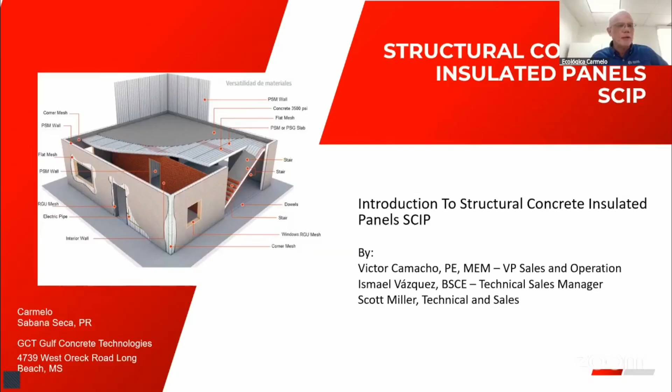And today we'll be speaking about the introduction of the structural concrete insulated panels. And I don't know if Scott is with us this afternoon. Scott is our sales and tech in Florida.

So we're going to give a short introduction of what the structural concrete insulated panels are. We'll go component by component and describe those, what applicable building codes for the U.S. and also Puerto Rico it complies with, and what thermal characteristics these panels have, which is a very good bonus there to do the construction.

Also, if we have time, we'll go over from the foundation all the way up to finishing the project. And also we'll be discussing several projects that we have done in the U.S., Puerto Rico, and also around the world with these SCIP systems. And then at the end, we'll collect all the questions and make sure they're all answered.

So what we're going to be speaking about today is structural insulated building component or structural concrete insulated panels. These were developed in Italy more than 40 years ago. And we have been using it widely in structures in the U.S., Puerto Rico, and the Caribbean. We also did some testing where we qualified for the Florida product approval, and we can also get permits with the government agencies for construction and for use of these buildings.

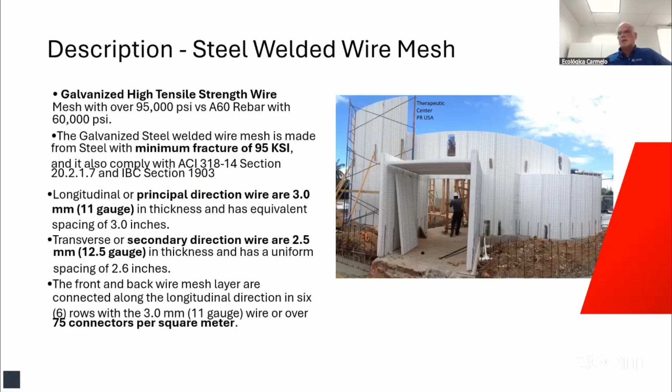So just to give you a little bit of detail on the wire we use, it's high tensile strength, galvanized, 95 KSI. And it has two types of strand. One on the vertical side, which is the principal direction, is 3 millimeters, or 11 gauge. That's where all your strength is. And we also have some cross wires which are 2.5 millimeters, or 12.5 gauge. That's your secondary steel.

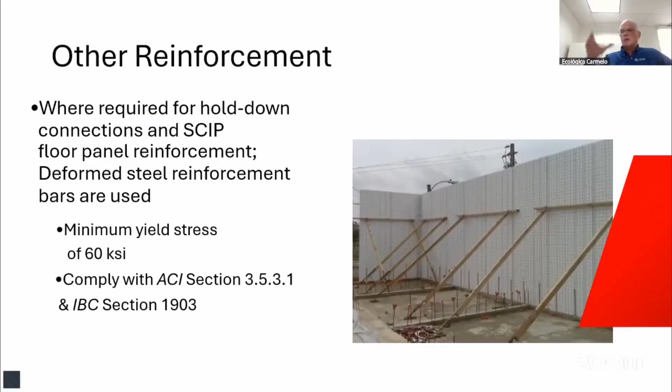And then what other reinforcement do we need? It all depends on what the structural engineer or the architect is looking for. They can do additional reinforcement, but mainly these systems were tested with just anchoring to the base of the foundation or floor using 3/8 inch rebar, drilled in about 7 inches, extending about 18 inches over the surface of the floor, spaced every 16 inches, with 2 rows staggered. So that's where you place the panel. A little bit on the mortar we use.

In our company, GCT, we make structural mortars in our plant, and we require it to have at least 4,000 psi. If you use another brand or regular concrete, it has to be 4,000 psi. And we also use a machine called the Monomix.

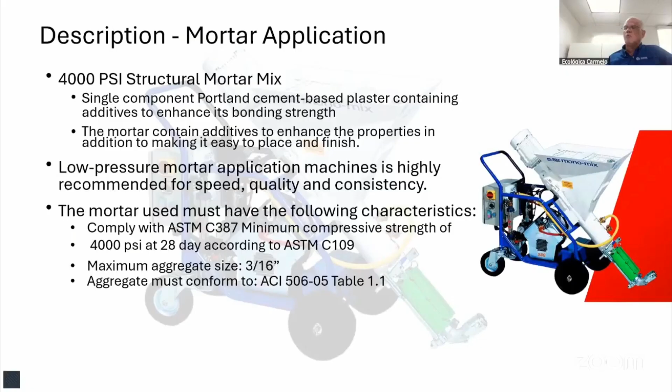This machine mainly pumps out in low volume, where you can put the bag on the hopper on the top, and it'll mix it with water, and it has a line about 32 feet, 25 millimeters or 1 inch diameter, and then you can spray the structural mortar on the walls or on the ceiling as well.

And then on the top of the slab, let's say in between slabs or on the roof, you may specify 3,500 psi concrete from your local ready-mix producer, which will have a minimum slump of 2 inches. That's real low, but if you have a high pitch roof, then it'll be 3, 4, depending on the design of the mix.

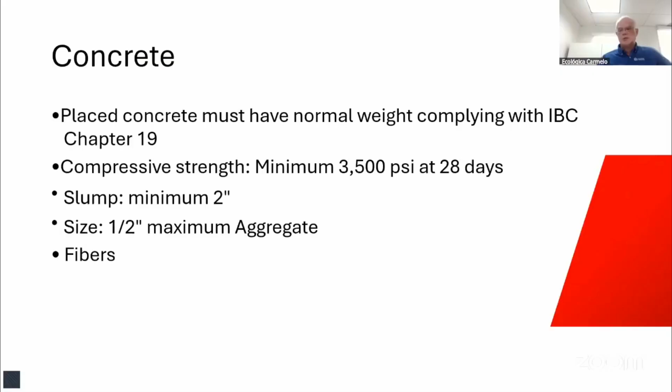And then the maximum aggregate you should have is 1/2 inch or less, so it gets in between the meshes and the foam as well. So that's all we require for the concrete over the slab or over the panel, and your foundation will also be regular concrete at 3,500 psi or 4,000 psi. All depends on what the structural engineer is designing for your foundation.

So what type of spans can we do with a PSM 80? That's one of the panels we use in our areas a lot, and you can use that up to 10 feet, and you can get up to 50 pounds per square foot of load, with your live load and dead load. So if your in between spaces are up to 12 feet, then you can't use that panel.

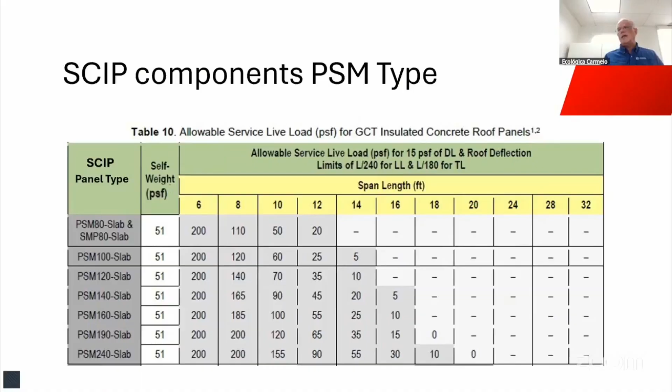So you go down your chart here, probably 35 pounds, is something that you can use. So you'd be on a PSM 120 or over, so you can use 120 to 240. But if your walls, in between walls, is over 12 feet, then you have to use a PSG.

So these are the PSGs, and they have a small girder, probably like 4 inches by 5 inches. And this is where we put two rebar, two number fours, making sure that you have chairs there so it's not sitting on the foam, okay? And these come in 2, 3 and 6 girders.

So it depends on the length you have in between walls or shear walls, or if you don't want any beams in between those. That's how much length you're going to want to go. Let's say you want to go to 20 feet. These are the type of panels you'll be using for those types of lengths.

And again, on the top, we're going to be pouring 2 inches minimum of concrete, okay? If you have a sloped roof, then it'll be 2 inches on the bottom, 2 inches in the middle and 2 inches on the top. That'll be your thickness of concrete over the steel mesh, okay?

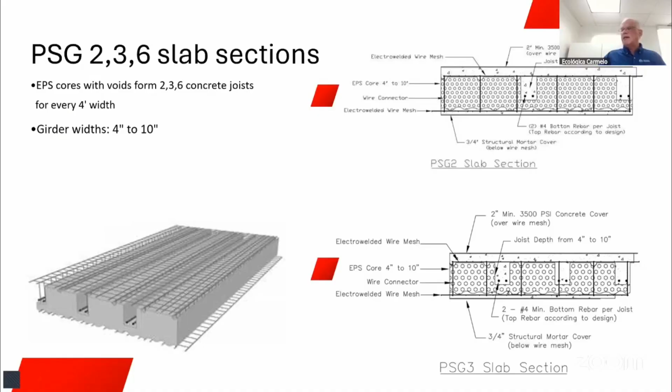But if you have a flat roof, then every foot you have to go up a 1/4 inch. So probably in the center of your building, it'll have like 5 inches, and at the end it'll be like 2 inches of concrete over the mesh.

So your PSGs, in terms of thickness, I love using the PSG 2100, which just maintains a slab about 6 inches, and it'll finish with your concrete and the structural mortar that's underneath. It'll finish about 8 3/4. And this will have like 50 pounds per square foot of self-weight, okay?

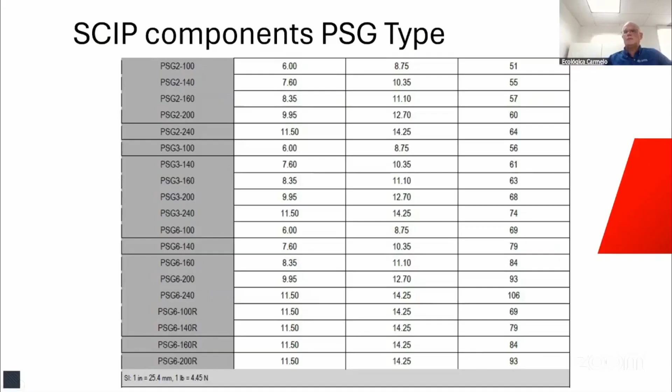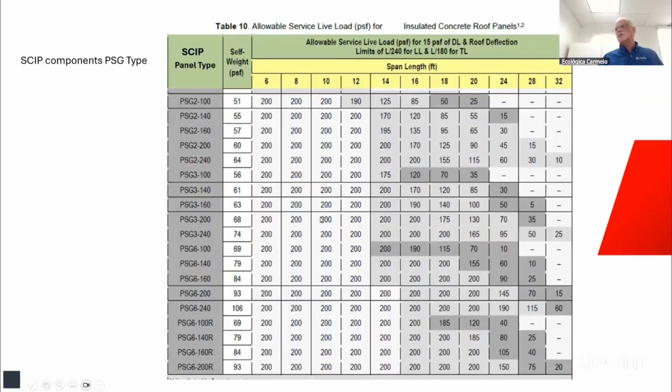And if you're a designer, we also have these tables handy where you can go in, let's say with your PSG2-100, and see how far you want to go in between walls, let's say 18 feet. So you still have a load about 50 pounds per square foot there. But let's say you want to go all the way to 32, then you can go to the PSG 6 240, and that's where you get the 60 pounds per square foot. So the longest we can go with these panels is 32 feet without any reinforcement or beams in between those two walls. So that's how you use these tables.

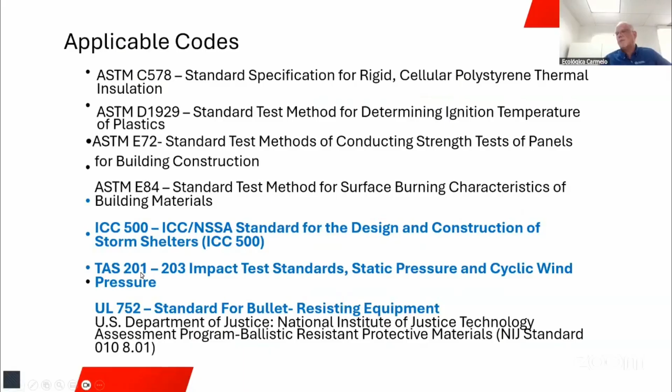So the applicable codes with this system: we comply with the International Building Code, Residential Code, the Florida Building Code, and the Puerto Rico Building Code. We also comply with ASCE 7 for minimum design loads. So we have done our homework in terms of lab testing these. Now I want to show you some of the testing we have done. It also complies with the ICC standard for design and construction of storm shelters, which is very important, and also TAS 201, which is called in Miami-Dade for high velocity winds.

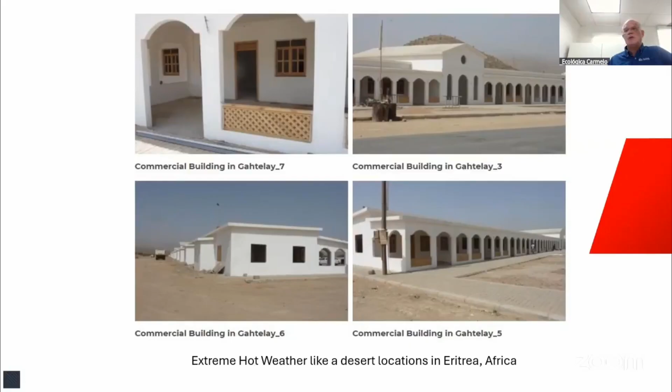And this is how these panels work. Let's say you have a beam of heat projecting onto a regular concrete wall, starting with 109 degrees. On the other side of that wall, if you touch it, it's going to be almost 90 degrees, so a difference of about 19 degrees. But with the structural insulated panels, with a core of 3 inches, you start with that 109 degrees, and you can see the gradient lowering throughout that foam, and it comes out almost 30 degrees less than where the heat started. So it's very impressive.

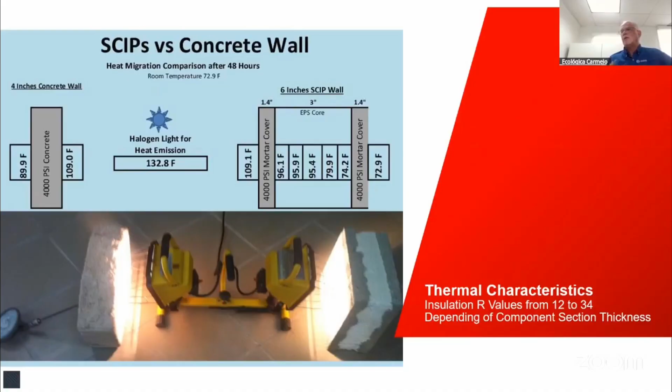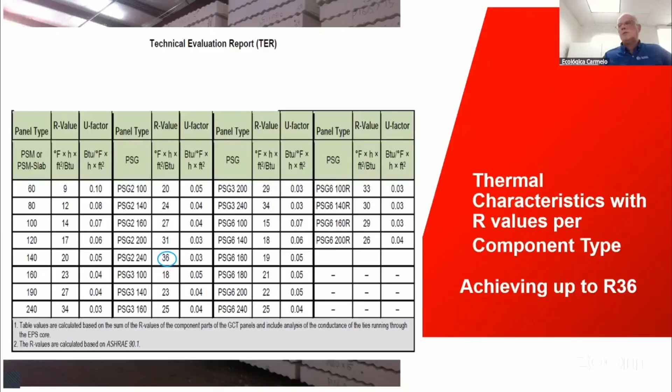So again, you can provide an R value of 12 to 34 on walls, and 12 to 36 on roofs. These are the R values for each of our panels. A PSM 80 will have an R value about 12. The U factor is 1 over R, shown in the next column. So from an R12, you can go all the way up to the PSG 240 with an R value of 36. All that is in our manuals, and you can download the technical evaluation report from our website.

So these are some of the tests we did to comply with the building code. We did bending, compression, and tension on the full scale system. We built some rooms and did the testing on those. In our manual, we have the actual loads for these panels. So a PSM 80 at 8 feet will have 15,500 pounds per linear foot.

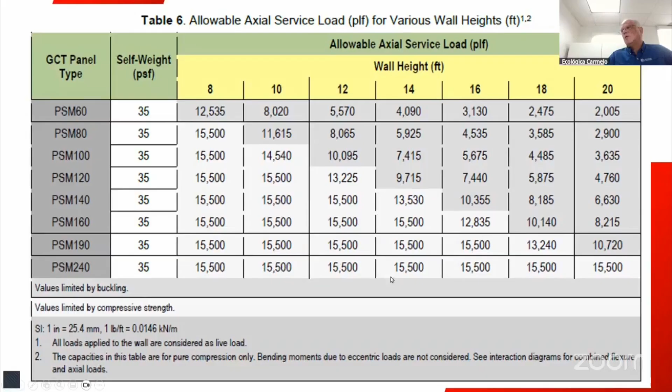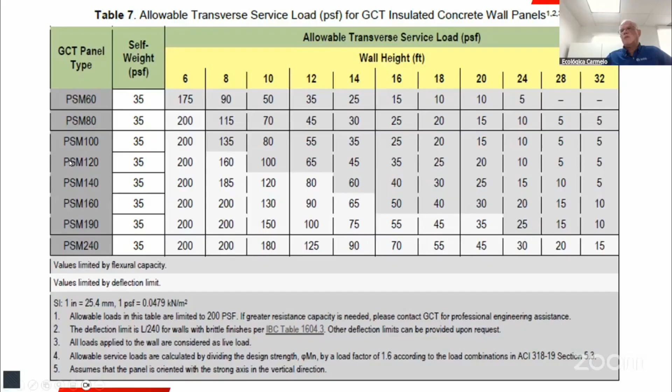If you go all the way down to the PSM 240, you'll have that 15,500 pounds per linear foot all the way up to 20 feet. This is just for designers to calculate which type of panel you'll be using in these structures. We also have allowable transverse service loads for wind. For wall height at 10 feet, this is allowable value for a PSM 120, I'll have like 100 pounds per square feet.

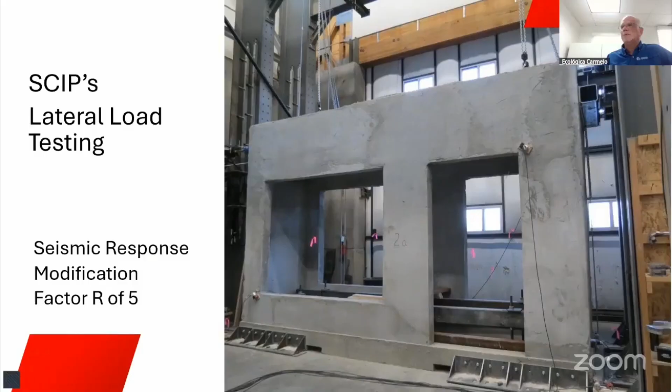So we went to the lab and did all this testing, bending, flexural, and one of the most interesting is the lateral loads, where it has a response modification factor of 5. Regular building materials would be like 3, a little bit higher, but ours was 5 plus 5.5, something like that. So for seismic it's a great product to be in right now, and also for taking loads laterally as well.

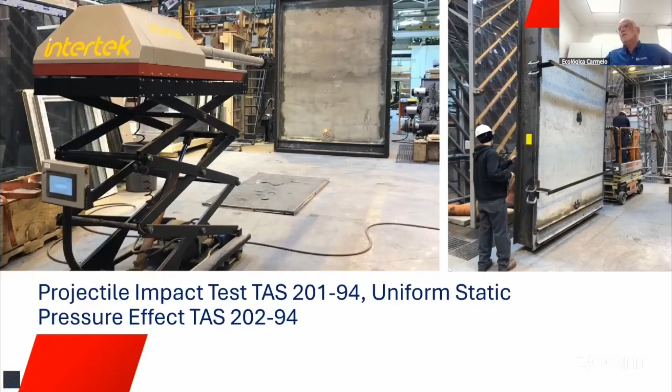We also passed the TAS 201 test. They project a 2x4 at 80 feet per second, and the way they pass or fail this test is that if you hit one side of the wall and there's nothing coming out on the other side, then you pass it. In high velocity winds like hurricanes, you can see 2x4s pass through block walls and other types of walls, so that's very important when we're building something. This is our report from Miami-Dade and also the Florida product approval, where we passed these tests with our system.

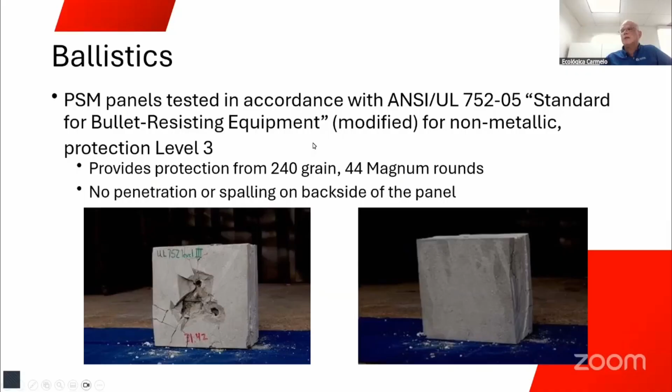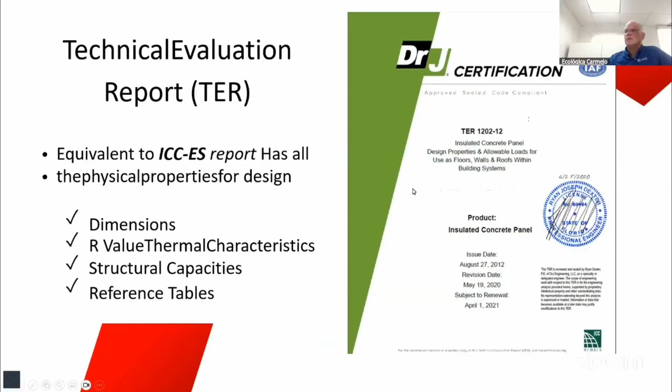So this is our technical evaluation report. This is how it looks, and this is equivalent to an ICC-ES report. Again, we have the dimensions, the R values, the capacities, and the reference tables we just spoke about, which gave you some details on those as well.

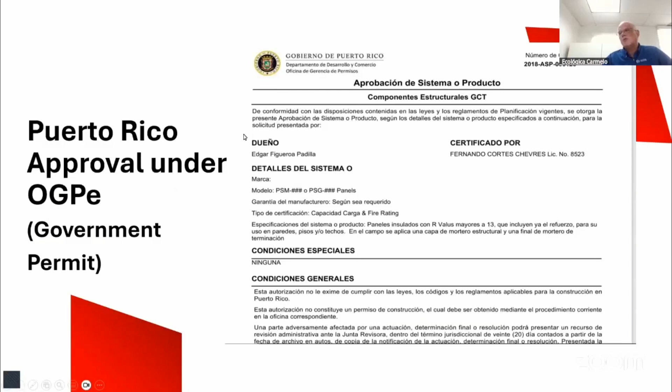The DrJ certification meets, let's say, 47 states, including Puerto Rico. If you have your structural engineer sign off in California, North Carolina, you can also do buildings in those areas as well, which we have, with the structural concrete insulated panels. You can get your approval with your government agencies for construction, or for use, to get those permits.

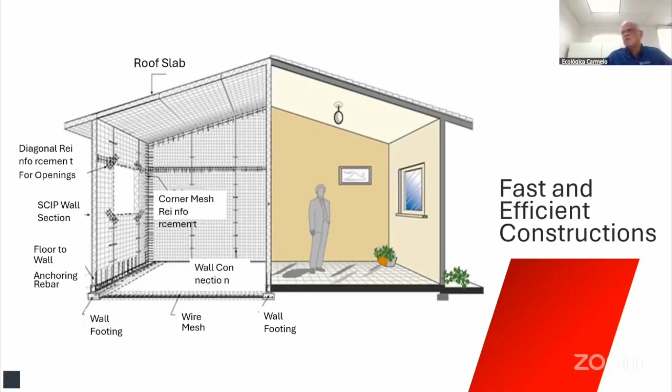We do a couple of reinforcements around the windows, U's, L's, and meshes, flat meshes. Once we have placed all our electricity conduits and the plumbing and we have everything in place, then we shotcrete the walls with a structural mortar. At least we'll be having, let's say, 4,000 psi, so it'll look like a conventional concrete house.

So the difference between a conventional construction versus construction with structural concrete insulated panels is that you don't need any big cranes to pick up steel forms or wooden forms. These panels only weigh like 1 pound a square foot, so they're easier to install. In 50 seconds you can install one panel, one next to each other. That's how quick you can do it. So this system is really fast in terms of labor and construction.

So you'll need less people to work, less. You can also say almost less skilled people, because I think when you most need somebody to erect these and finish it is when you're doing all the plastering. That's where you need somebody very good doing those finishings. But anybody can place them one next to each other and then work them. So you'll have a cleaner, safer working environment when using these panels.

Again, we're comparing here traditional blocks versus a wall with panels. When I speak to some contractors, with 2 people you can put from 200 to 300 blocks a day, that's about 265 square feet. But with panels, we have installed from 1,000 to 2,000 square feet.

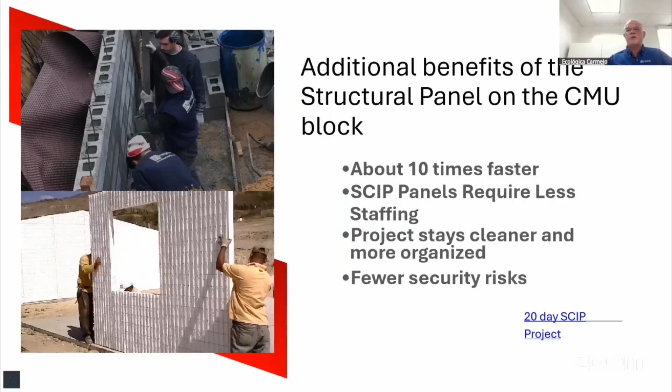That's almost 10 times faster when you're doing that. But again, you need a good construction schedule to do it quicker and faster.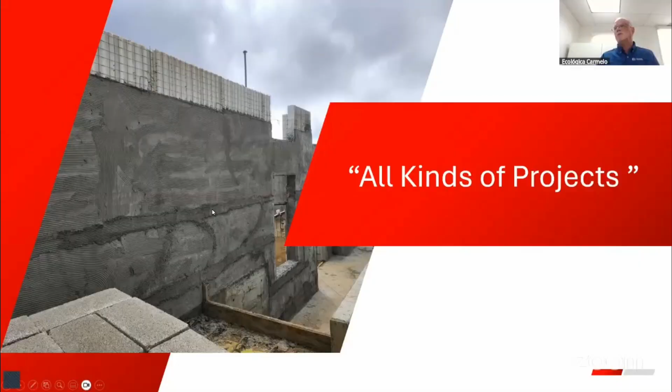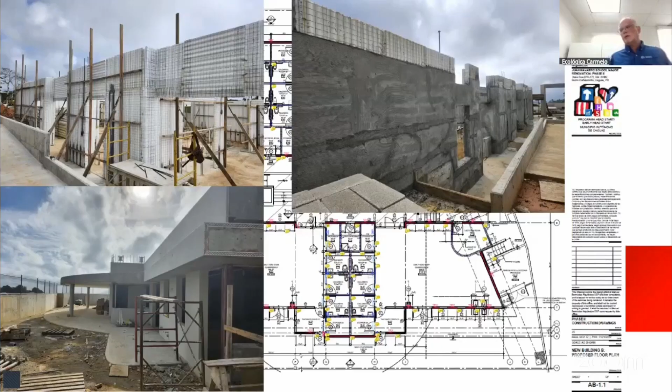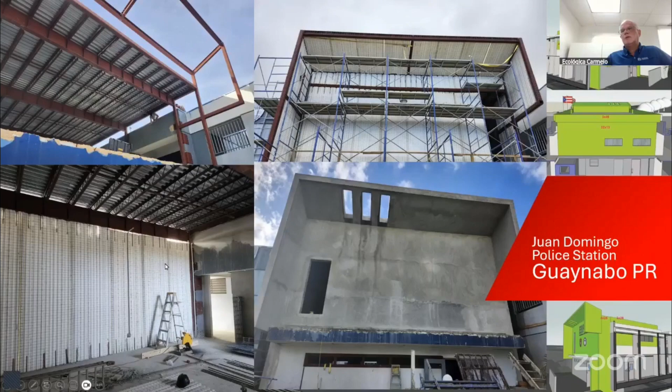Let's see all kinds of projects we have gone through with the SCIP panels and also Madeira as well. Here this is a school. They did the walls, and also the ceiling has insulation as well. You can see here on the top where they twist the panels to the side and use it as a beam. So every foot of this panel can either be a column or a beam, whichever you want to use it as. Here we integrated steel with the panels. They welded the rebars onto the steel, and they placed the panels and then the mortar.

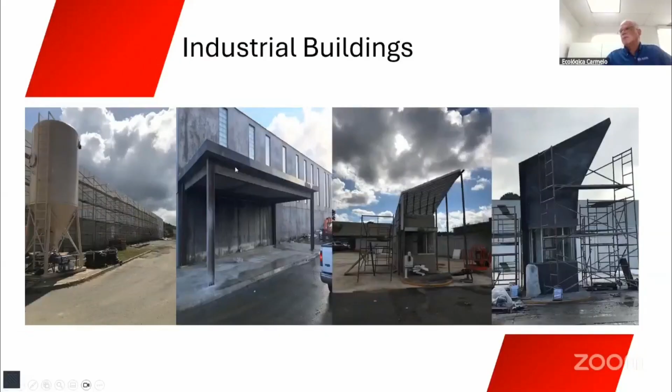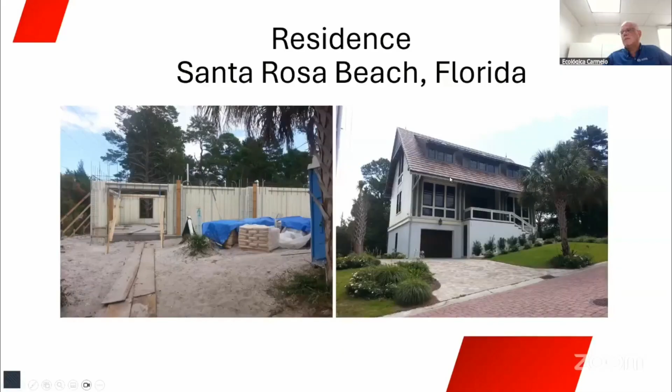More projects where they have combined wood and also the panels as well. Here you can see the columns and beams. As I say, you can build all your beams and columns with this material and also create shear walls as well. This one is also in Florida.

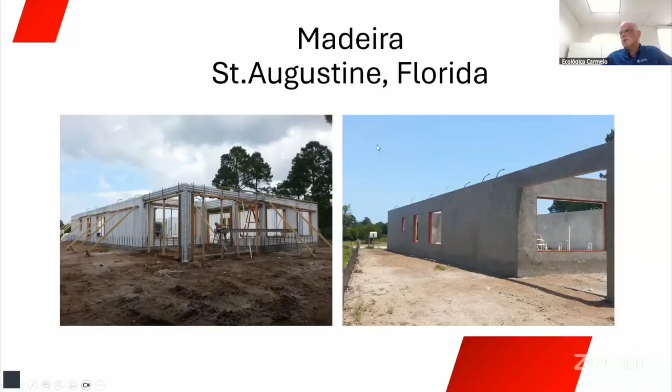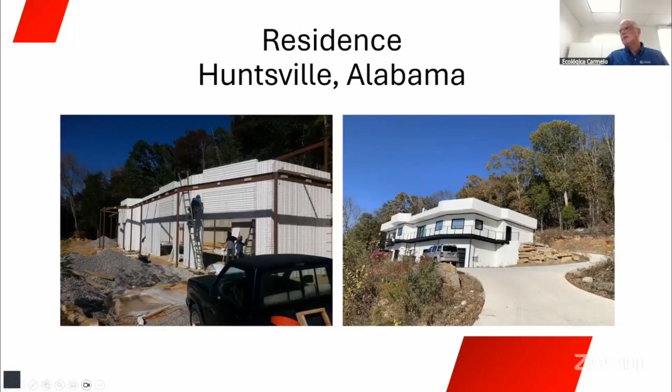Where we have our plant in Mississippi, this house is also all walls and roof, slabs in between, are all panels. In Texas and Alabama you can integrate steel as well - they did a steel porch here. You can also do it with the panels, probably the look that the architect wanted in that project.

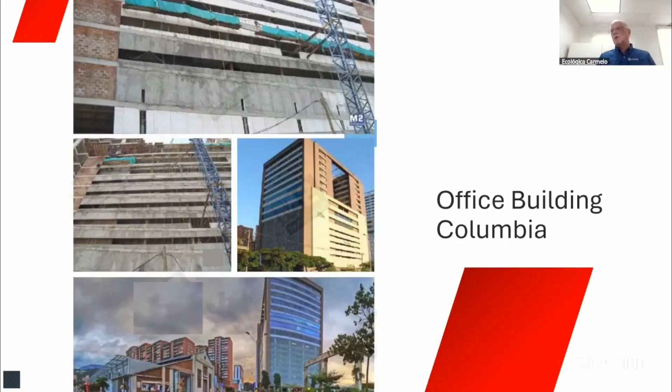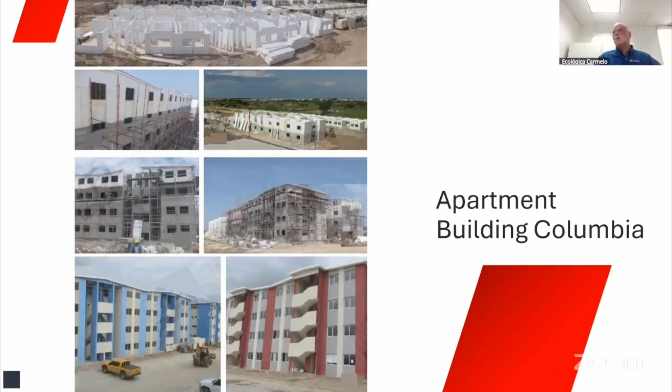Just the panels alone, if you were doing a building with just panels, you can go up to 4 floors, which I'm going to show you an example of real soon here. There's another type of structure, and you can see that you can make these panels rounded. This is the project where we did all the panels from the first floor to the top, so it's a 4-story high building, and everything is made out of panels. So it's a doable structure to just do it with just panels.

And again, that's the general information of these panels. Since we have a little bit more time, I'm going to spend the next session talking to you about some of the details we do when we're building these panels.

We start off with our technology, where it started in Italy over 40 years ago. The great part about this system is the R value - it lowers the heat or the cold inside that building, depending on where you have your construction. Our GCT has the Puerto Rico Building Code and Florida product approvals, so we can build these with the building code. We've done residential, commercial, industrial, as you've seen in those pictures. And the best thing is that there were no damages to construction after Hurricane Irma and Maria in any of the buildings we did in Puerto Rico.

And it's a very durable system, especially on the beach or in the waterfront.

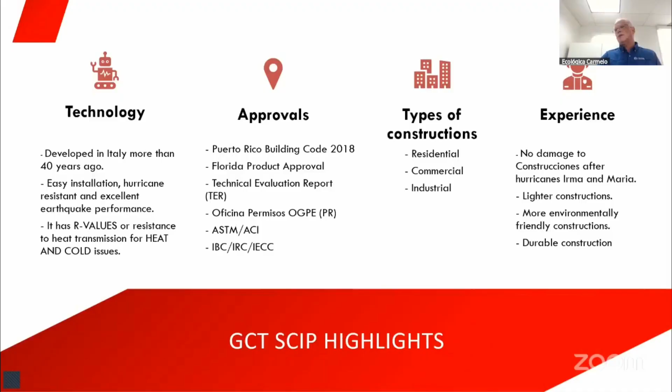So how do you start with building with this system? You start off with your foundation, and then you put your plastic sheeting, so no humidity or moisture comes up from the ground.

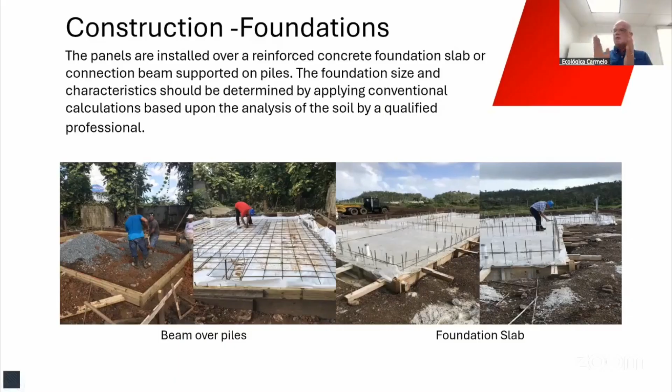You put your rebar, so now you make your foundation. It's not necessary to put all your dowels up from the bottom; you can drill them later. I prefer that, so you can finish your floor easily without having all these rebars in the middle. The problem with putting rebars from the bottom, from the base, is that they start twisting and turning, and then when you go to put your panel, it's a little bit difficult.

But the way we like to do it is drill a hole, let's say 7 inches down into the foundation or base, and then leave 18 inches over the surface of the concrete. All you need is a number 3 rebar, 3/8 of an inch. That's how we tested it with the technical evaluation report. If you want to go to 1/2 inch, that's your decision, but with 3/8 it's enough.

So you start on one side of the wall, let's say at 0.0, and every 16 inches you drill a hole. Then on the other side, you stagger it 8 inches from the first one, and every 16 inches you space them out. So every 8 inches you'll have a rebar on your wall.

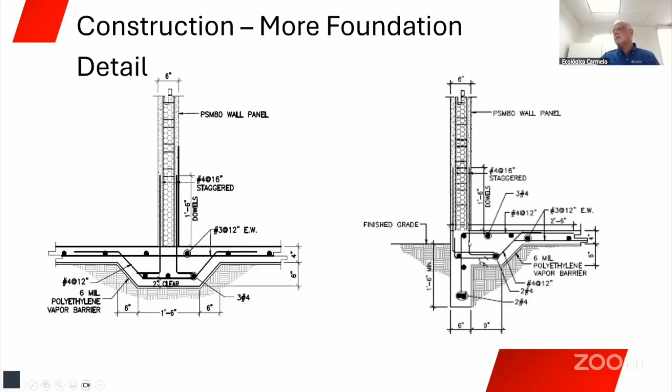Now let's say you have an in-between wall foundation. It's the same thing. You drill your hole 7 inches down with your epoxy, and if you're on the lateral sides of the building, you have some sort of foundation like this one.

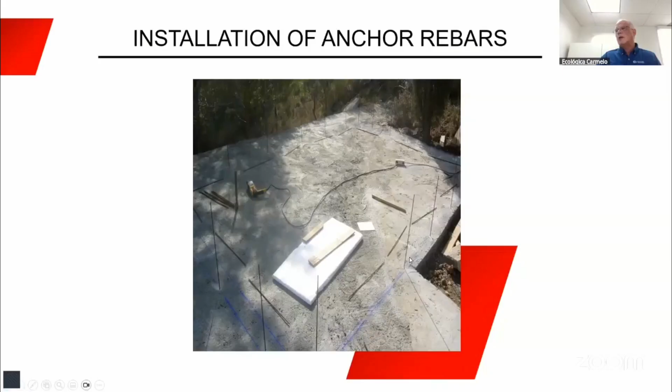So you mark it with a chalk line where you want to put your wall, then drill the hole every 16 inches like you see here. You're better off doing it afterwards, after you finish your floor, because that way any mistakes with plumbing can be fixed—you can move the wall 1 or 2 inches to the side, and it'll help you out.

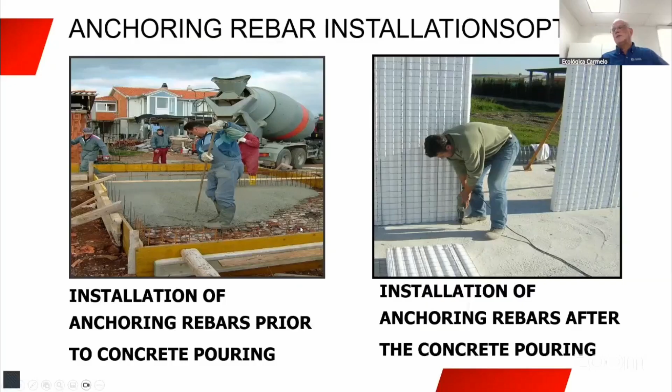Now if you start with your anchoring rebars from the bottom, that's where it gets a little complicated when putting the panels—it won't be straight.

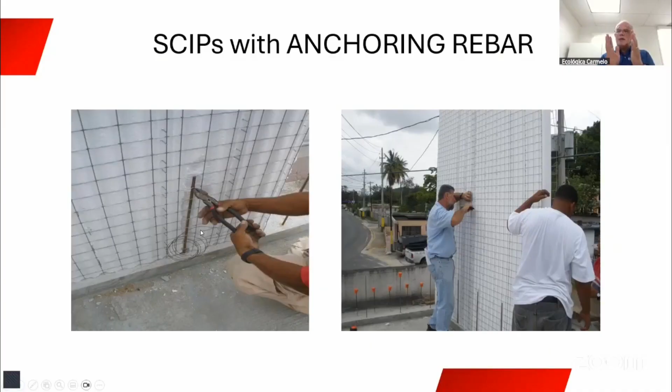So you take tie wire where your rebar is, and these rebars should go inside the panel, inside the mesh—you can't see them outside the mesh. That's the way they were tested.

You start putting your first panel from one corner, and let's say you want to finish a room, you just finish that room. Or you can do the whole wall from one side to the other and cover a couple of rooms, but then you put one in between so you have the stiffness of that corner.

That's the idea—when you're out there, you have the wind and sun on you, and the wind trying to move these panels. That's why you want to start from a corner, tie it up to the next intersection, and keep going. This is the way you do it.

The way we cut the wire, you can either use a long plier or a diamond disc grinder. That's how you cut the wire.

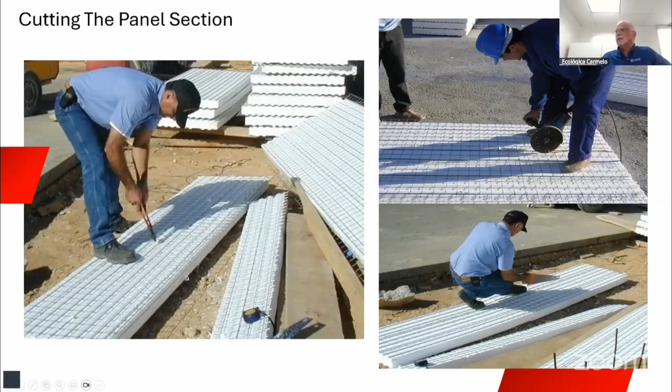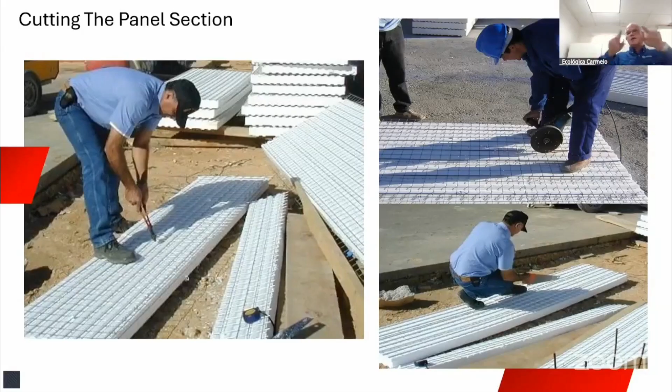To cut the foam, it's just regular—you use a regular saw and cut it. Some people like cutting it on the floor. Some like putting the whole panel on the wall, marking where the window or door is going to be, and then cutting it right there.

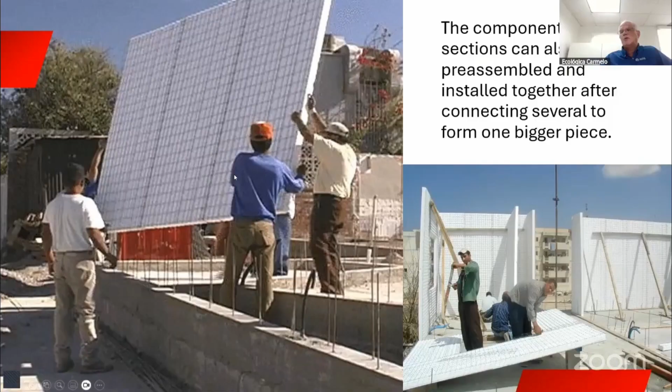These guys are very aggressive, carrying 3 panels at the same time. I urge you guys to just do one at a time—it's real quick, so no need to put any hassle on the workers. It's easier to do it one by one.

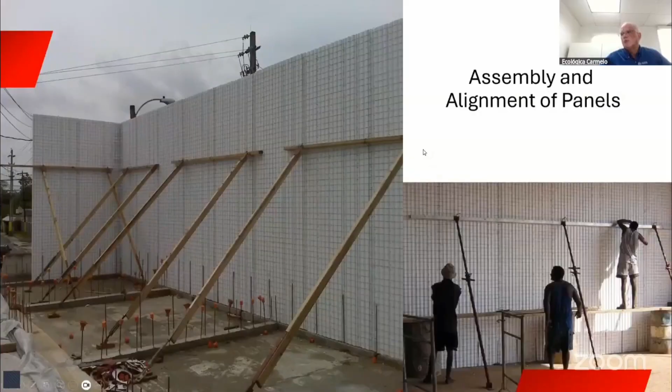Then you can do an assembly alignment like these, where you fix the wall making sure it's 90 degrees to the floor. The idea is you put these wooden frames and fix them to the floor, then start shooting mortar on the outside. Once you finish shooting the mortar on the outside, you take the frames out and spray the mortar inside. They come in aluminum, or you can find them in wood.

The main thing is to have that first 2x4 positioned about 1.5 to 2 feet underneath the level of the roof, because on top we're going to put an angle mesh. It's very important to plumb these walls at 90 degrees so you'll use less mortar to finish off the walls. These walls come with an overlap on one side, and then on the other side another overlap.

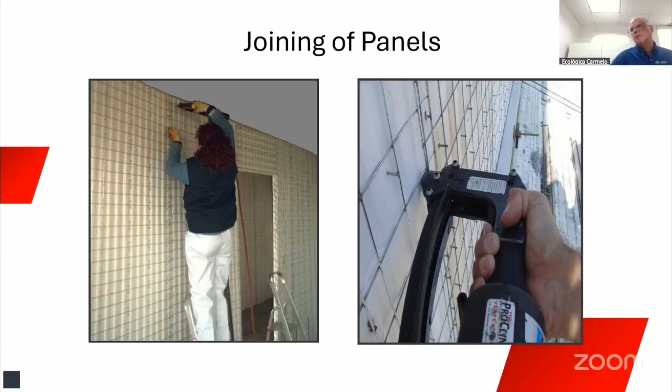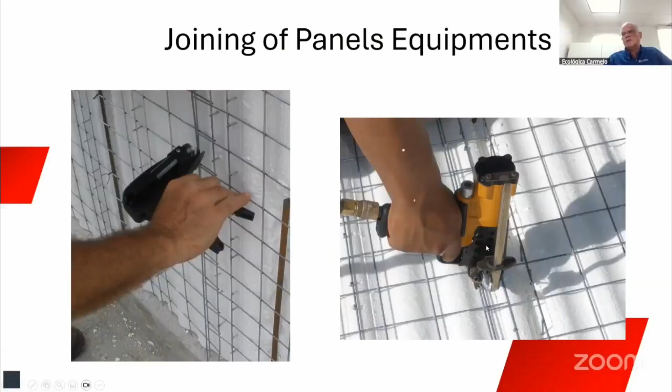So how do you join them? You keep joining them one next to the other, then you put a clip every 6 inches, and that's how you join them. Mainly you would use a 90 psi compressor with this machine on the right, that's the one we recommend because it's easier and faster. If you have 2 in your projects, it'll be much quicker.

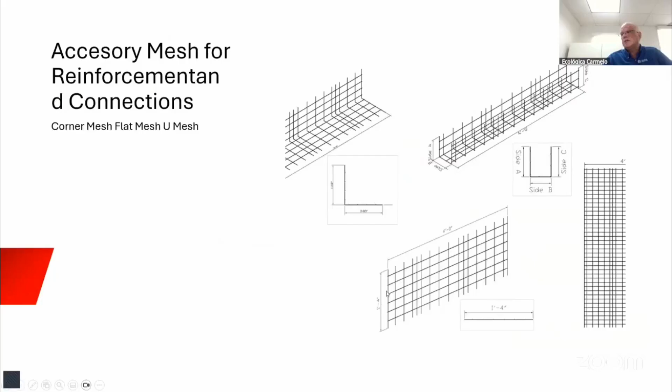These are our meshes: the L meshes, the U meshes, and these are your connections. We also have meshes that are 4 feet by 4 feet, and we also have the flat meshes, which are about 15 inches to 4 feet. I'll show you in a minute where you use these.

If you have the assembly of the floor with the wall, you use 2 angle meshes there and fix those 2 walls together. Then if you have a joint like this on the outside, this is where we use a 12 to 15 inch mesh on that side. And if you have a building where you're going to put another wall on top, you put an angle mesh, and then a flat mesh to join the 3 panels - the slab panels and also the 2 wall panels.

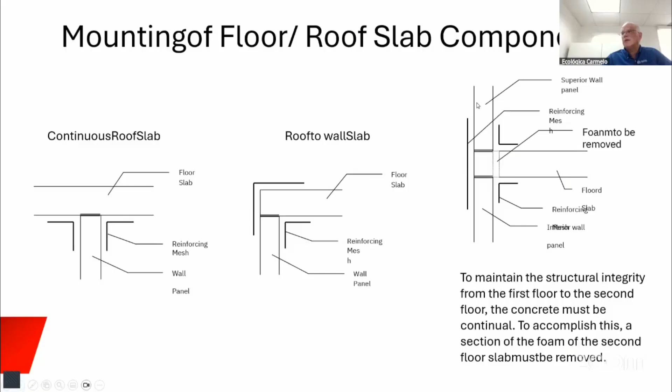Usually what we do is leave 2 inches on each side of structural mortar so that when we put our window frames, we have at least 2 inches where we can go with our Tapcon screw to align and fix those windows to the sides.

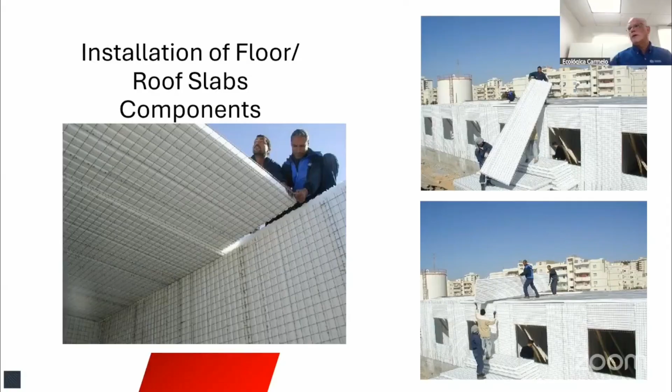Once you finish putting all your walls, you put your panels on the roof, making sure that everything is level. Then we can also use on the roof these PSGs we spoke about. We do like a bond beam where we have the rings, 3/8 of an inch, spaced out 6 to 8 inches, and then you have 1/2 inch rebar - you put 4 of them there, and so you create a beam.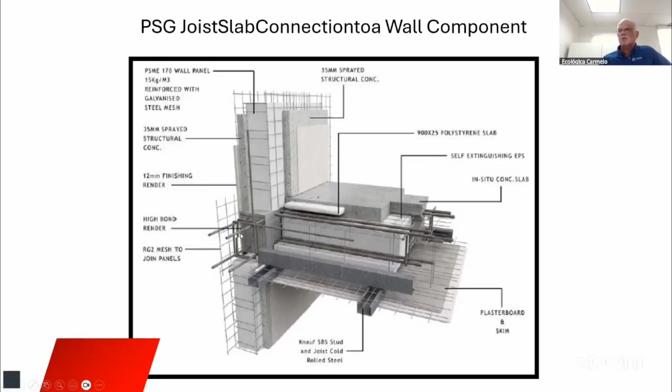So in your girder, when the rebar is coming down, you'll finish with this bond beam there over the structural wall on top. That's when using this type of panel - that's just an idea. Here's an example of that.

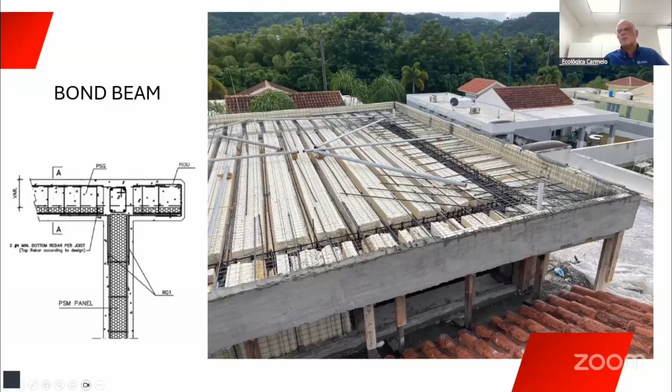This one has a cantilever about 4 feet, so they decided to put the bond beam here and to the right as well. You also see negative rebar on top every foot, probably 1/2 inch - that will help with that cantilever as well. We have drawings as well; we can provide the design in CAD and also PDF.

When you're shoring it on the bottom, make sure they're spaced out every 4 feet before you get on top of this roof. It's very important that along the length of that panel you have a perpendicular 4x4 or 2x4 crossing it, so that it'll support what you're doing on top, and it'll also support the weight.

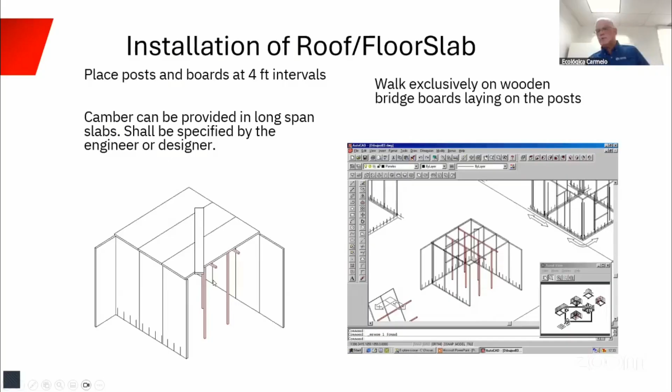So you can see here the 2x4s - they already put some electric there. For the plumbing and electrical installation, we buy ourselves a heat gun, which must be at least 1,000 Fahrenheit. Then you mark all your boxes and where you're going to put your conduits. Sometimes you don't need to cut these meshes if you use flexible wiring tubing. Here you can see how they use a 2x6 mold for the frame, and when they spray the structural mortar, you already have it ready for the walls and windows, for that framing.

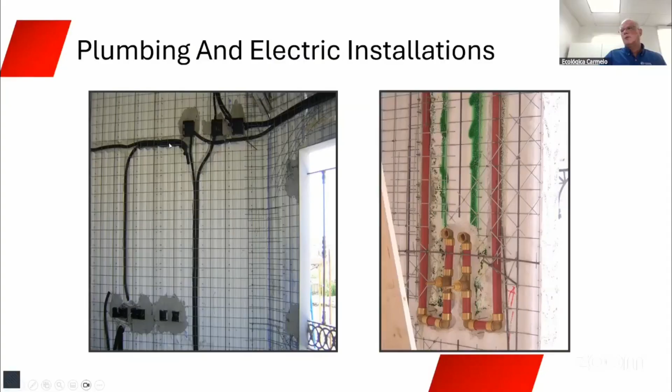So you can buy one of these heat guns, and you recess the boxes where your finishing is going to be. You do your plumbing, and wherever you break the mesh, you have to put a flat mesh over that. So you melt the surface of the foam, then you put the conduits. That's how you do it, whether it's plumbing or electric, you do it the same way.

So once you have everything put together, the angles, the meshes, the wiring, at least the plumbing and electric conduits, then you're ready to apply mortar. What we do is put guides every 3 feet or 4 feet, using a half inch pipe schedule 40, which has an exterior diameter of 3/4 inch, because we want 3/4 of an inch of structural mortar over the mesh.

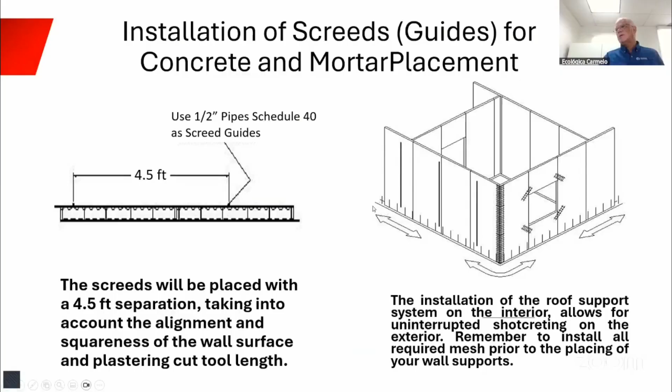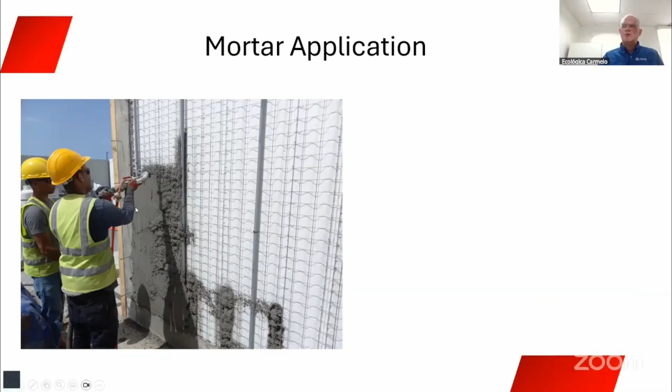So you start from left to right and start spraying from bottom to top. You put your pipes, and you can use tie wires there. You start spraying from the bottom, and after about 15 minutes you take out the first guide. You take a knife and cut the tie wrap.

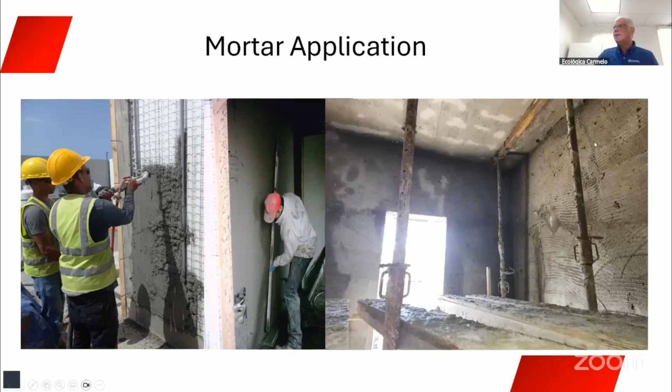So you screed the mortar, and after you screed it, you make lines from left to right so you have a mechanical bond on your walls and also on your ceiling. This is because if you want to spray an additional coat of finishing mortar, like 3/8 of an inch, you would need that bond.

If you're using a synthetic stucco, which is sprayed on, then you can leave your structural mortar flat and do that. It all depends.

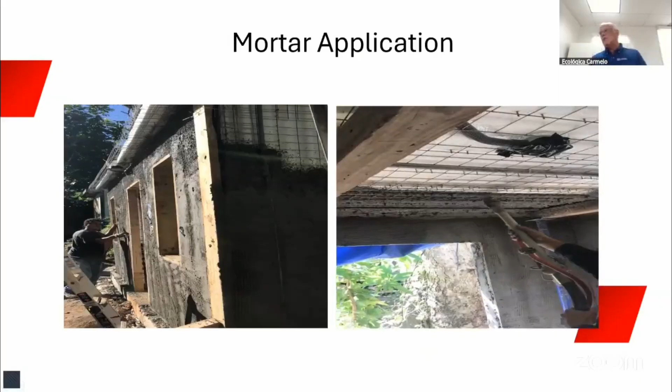And on the ceiling, we do it in 3 passes. We do a light pass first with the structural mortar, up to the mesh, then we put the guides over the mesh, and that's your third pass of structural mortar.

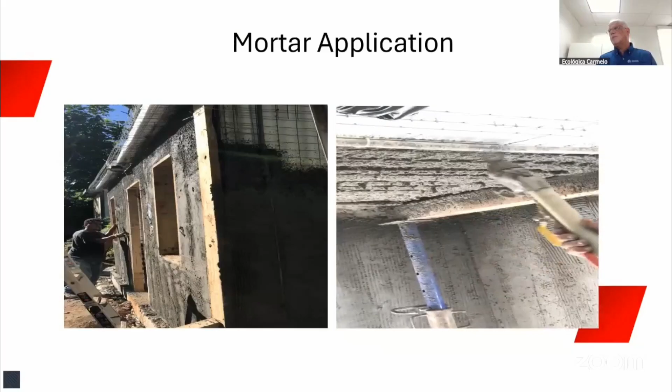Everything you see, they use duct tape to make sure the boxes don't get dirty. You can see there the guide, the PVC pipe guide. So let's leave it there.

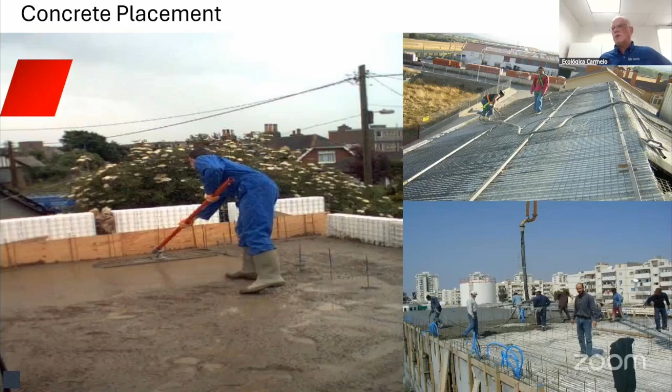Yeah, hi. I'm coming from a background of forming and casting. I was wondering if it's possible to use the EPS in the center of a formwork and cast concrete on both sides. It seems like it would be quicker to finish that way than the shotcrete. Is that possible?

Well, we've done precast elements. You can do it outside and then bring them to the site. There's a factory in Texas that does that. We saw the panels, and they cast at their site. They cast the walls and just bring them in. I might not have understood what you wanted to do.

I'm actually talking about cast in place. You erect the walls first, the standard way that you showed us, and then you form around those walls. Then you cast with, say, pea gravel concrete mix. Is that possible? Because I want to use it as a curtain wall, and I have to cast the columns and the beams. So if I could cast everything one time.

Yep. So Ismail, I'd like to tune in here. Yeah, go ahead, Scott.

That's certainly possible, and it's done a lot. I know that one of the longtime designers out of Argentina does quite a bit of it. I would say it's best suited for multiple building projects. There is an investment into the forms, so you have to run those numbers, and if it's available for rent and all of that, that's all good.

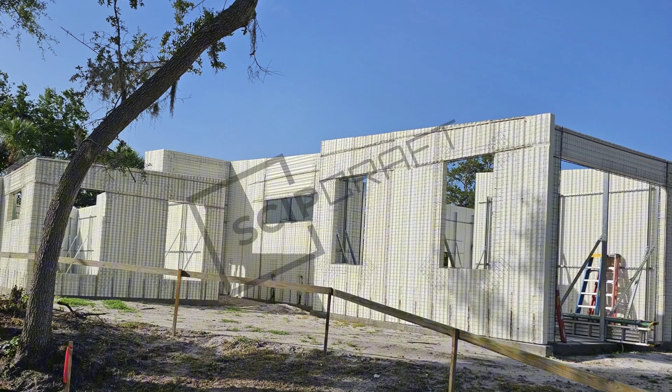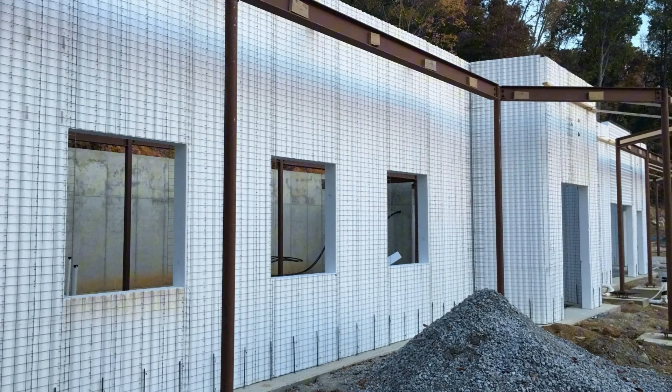You're welcome. Hey Scott, this is Robbie. I had a question for you. Can you guys do an integral color when you're applying that finish mortar on the exterior? Like if you wanted more of a white finish, can you just go ahead and integrate color? You sure can. We do have finish mortars that are colorized. You really need to look at your water content and be very, very consistent to be as consistent in color as well. So yes, that can be done.

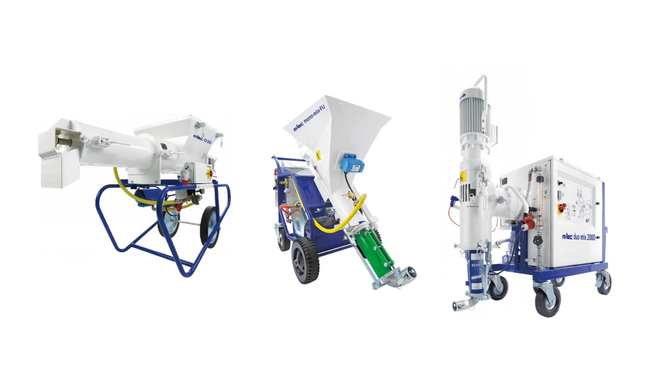A lot of times, I'm not trying to not sell you finish mortar and things like that, but sometimes it can make sense to colorize and seal with another finishing product. If you colorize the mortar as a finishing mortar, you are still most likely going to seal it as well anyway, with a clear sealer or what have you. Thank you. That makes sense.

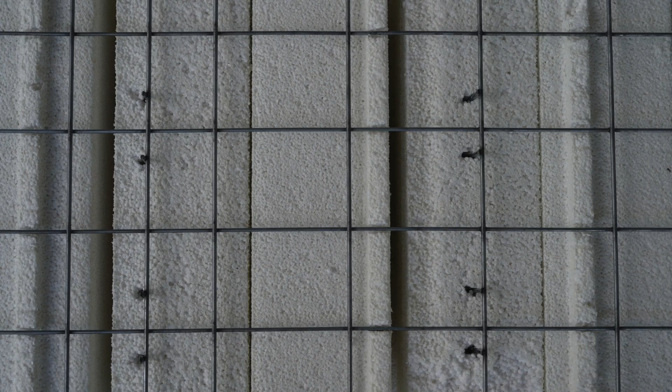Hey, one question: is there a cost comparison sheet, something that we can look into? Okay, I'll weigh in, Ismail. The way I'd like to frame that is to let you work some numbers, and we can look at different projects, or I have sample projects, and we can chew on that to have you understand what it takes. And there's lots of considerations. I have an Excel file that I use that you can use. It'll put it in terms of man hours for you.